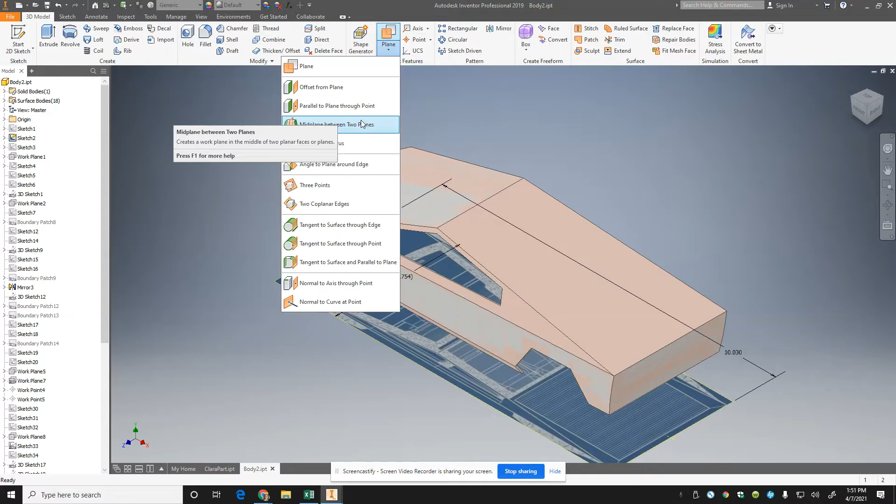First thing I'm going to do is make a work plane parallel to plane through a point. I'm going to make it parallel to the bottom plane.

A lot of you guys made work planes on these surfaces, which is a good idea, but you don't really need to. You make a work plane on the top, and I'm thinking we'll be able to emboss on these surfaces. But now I've got to be able to see through this model, right?

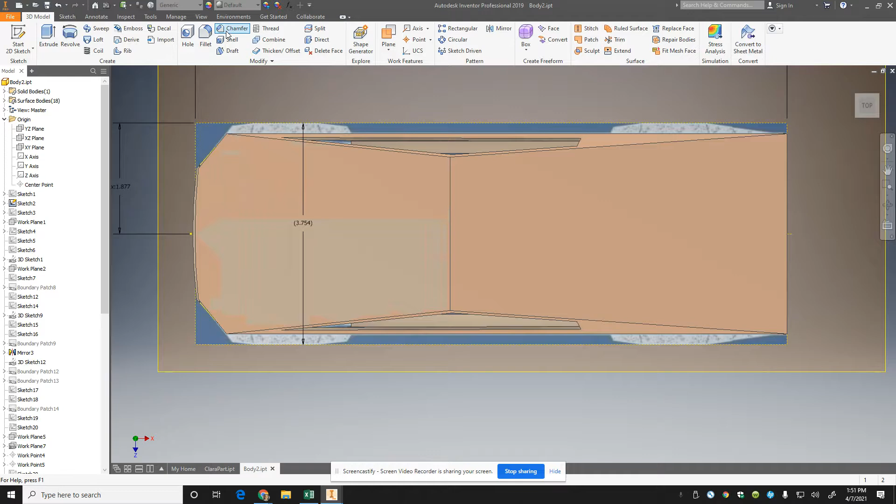So there's a few ways to do that. You can change your visual style to shaded with hidden edges. All right, that didn't really help.

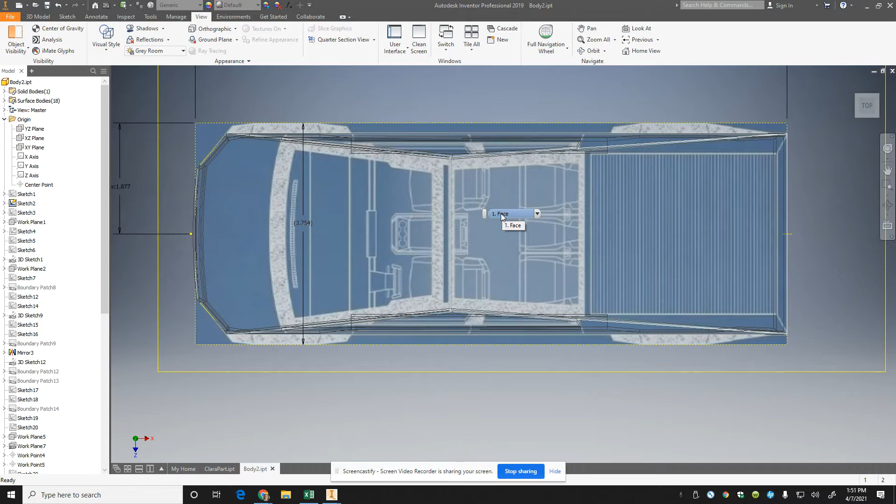I can change it to wireframe, model edges only. What wireframe does is allow you to see through everything. Your model's still there, it's just the outside edges are in wireframe. That's very common, having to change to wireframe mode.

So now what I'm going to do is sketch this. All right, and probably what I'm going to do here is... bless you.

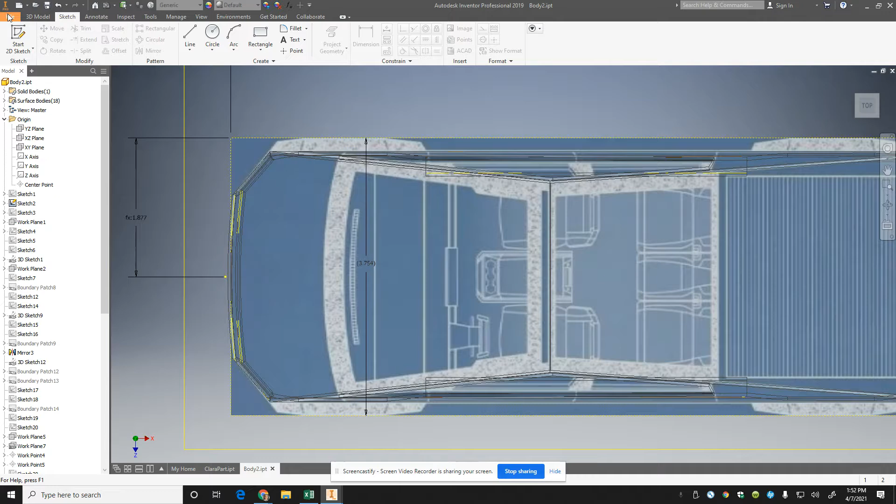Start a sketch on that work plane I just made.

This is probably the center point right there, right? It's probably the center mirror plane. Let me see here. Yeah, that work plane is what we...

All right, so I'm going to make a line down the center. I'm going to do some mirroring here, possibly. I'm going to draw these windows here, but I want them to be symmetric.

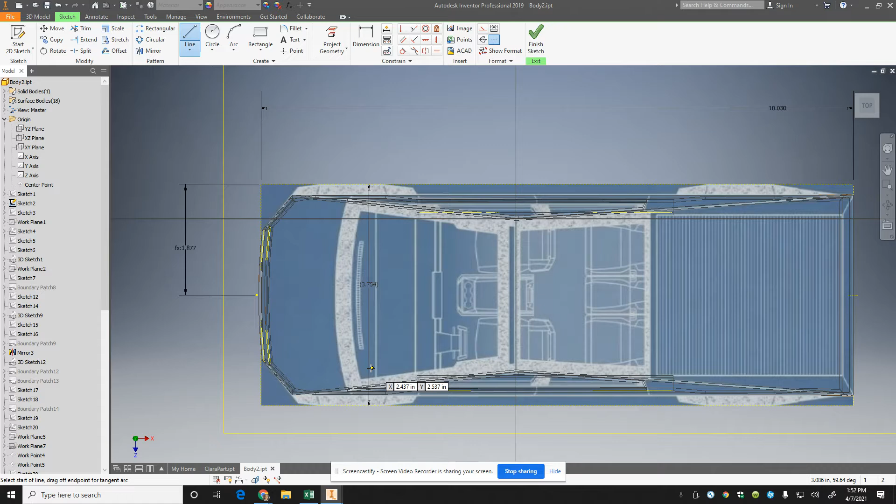So, first thing I'm going to do is draw a construction line right down the middle. All right, I'm going to draw some solid lines.

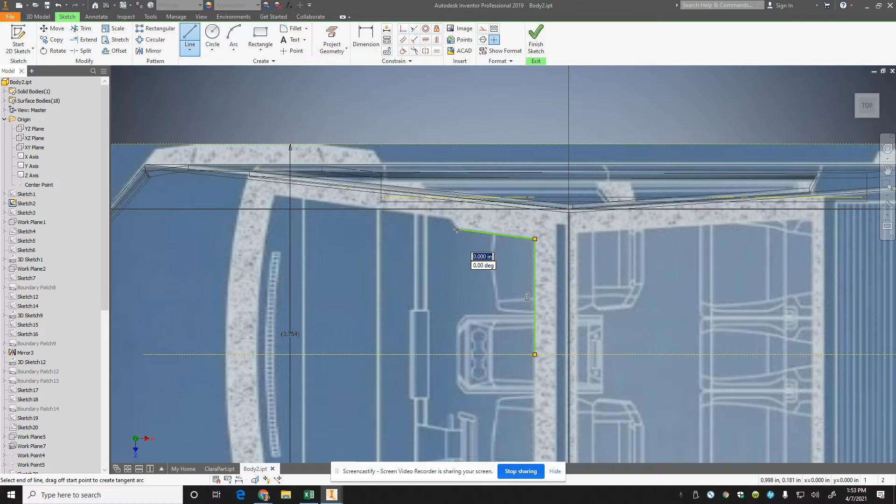Let me zoom in here. Hold down Control so things aren't snapping.

All right, I'm going to mirror that real quick. All right, draw an arc here.

Not bad. Hold down Control so it's not snapping. I guess I'll draw this one back here too.

Again, I want everything symmetric. That's why I'm mirroring.

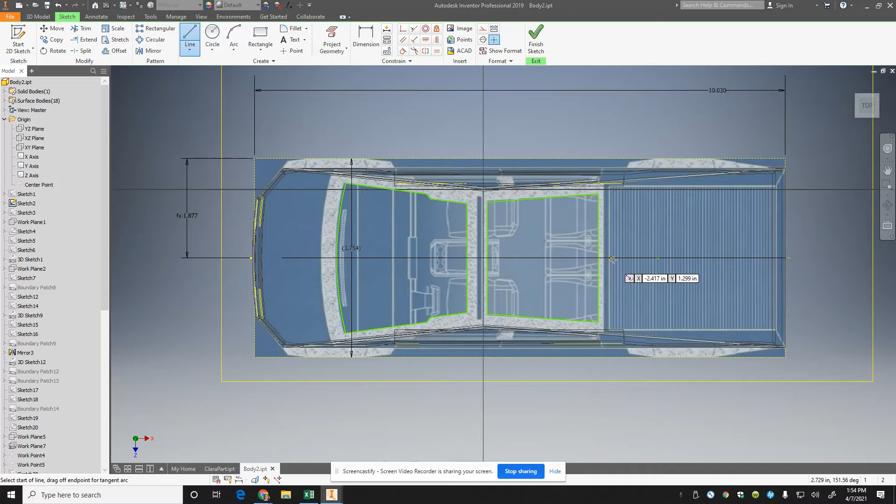All right, and the solar panel on the back here. I don't know how I'm going to do that yet. I might come back to that. I don't even know if I'm going to include that solar panel yet.

All right, so I have this sketch hanging out now. I'm going to go back to my view. Shaded with edges, all right.

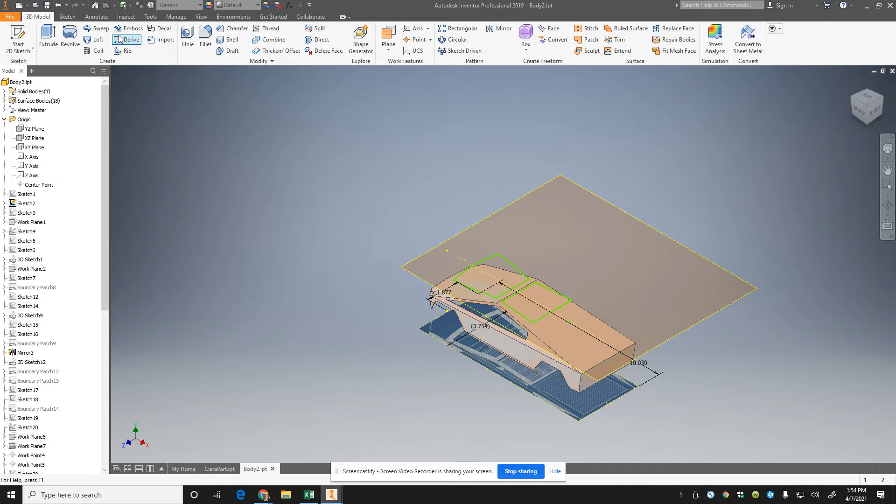I'm going to see if I can emboss this. All right, let's see if it works or if it utterly sputters out and fails.

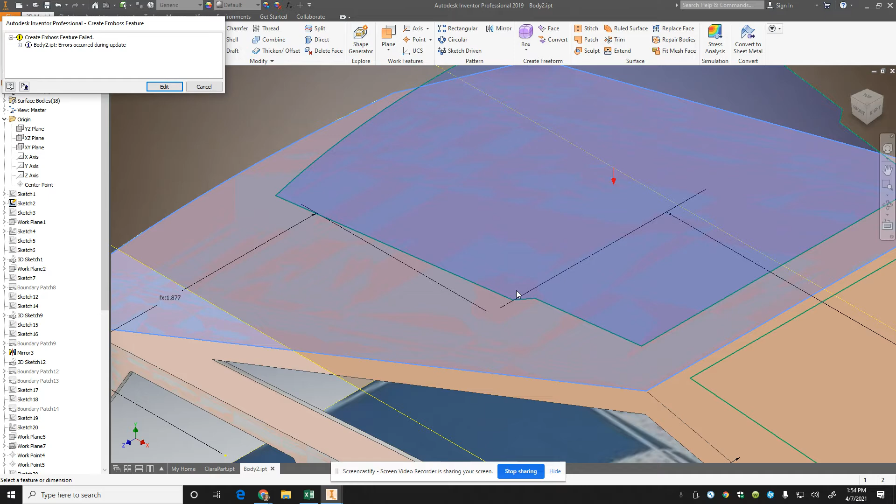Yeah, it probably won't do it to this one. So my embossing of this onto this front windshield didn't work. Why don't you think it worked? Yeah, it's way too irregular. Way too irregular. So I'll have to do like you guys were doing with that work plane.

But I'm thinking in the back, if I try embossing that, I think it'll work. Actually, am I doing that the right way? Let's see. Nope, try that way.

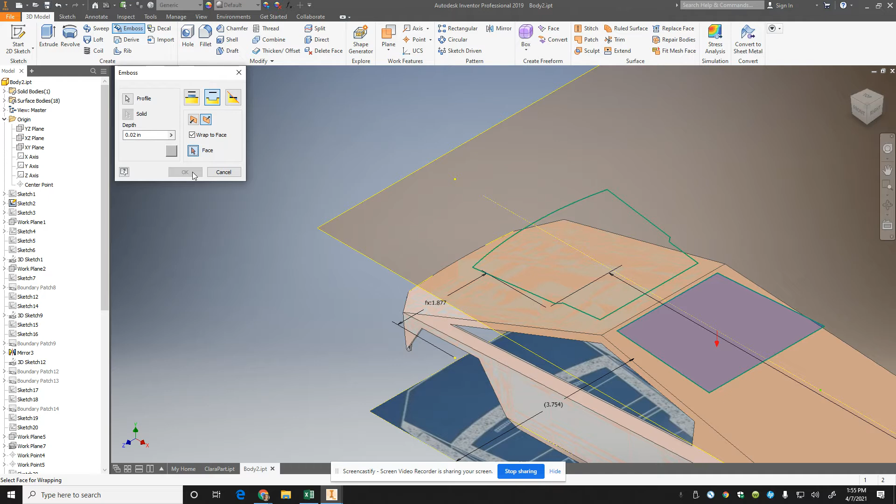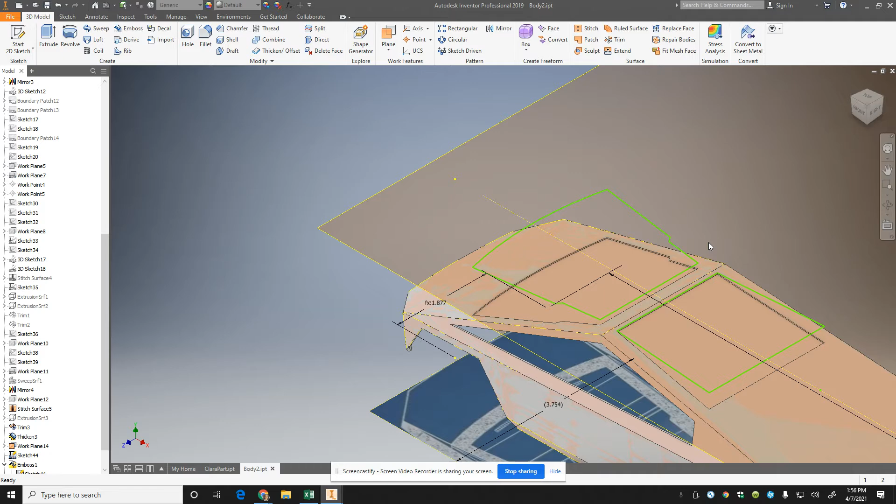Oh, there we go, it worked on the back. Let me make that sketch visible - I had the wrong approach. I shouldn't have tried wrapping the face. Let me try that again. Emboss here, cut... oh, it did work, guys! You just can't click wrap the face. That's a much easier way to do it. You make the work plane above it, draw your sketch through it, and when you emboss it, it just makes it go right down onto it.

So that's kind of cool, I like that. Embossing worked nicely. You guys get what I did there? Just one work plane up top, sketch it, emboss it down. Looks great, I think that's the easiest way. I didn't even have to click wrap the face, I just had to emboss it.

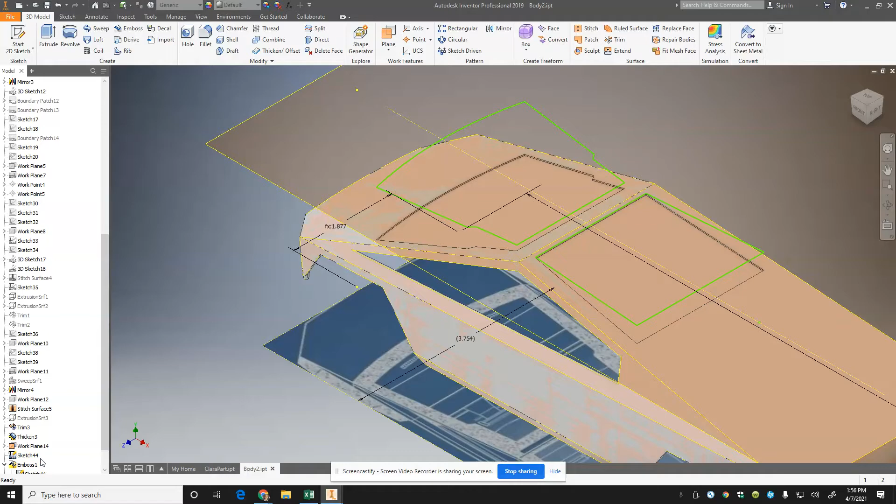Now for the solar panel, let's see if we want to get a little crazy here. Let me go back into this sketch. Let me go view... wireframe. All right, what am I going to do over here? Well, I might do, guys - what I'm thinking for the solar panel is kind of a stylized version of it. Not try to replicate it exactly, but make something that's kind of similar, but it'll actually be visible, just to make it look kind of interesting. I don't know, maybe make some lines. Let's see, let me get my sketch tools.

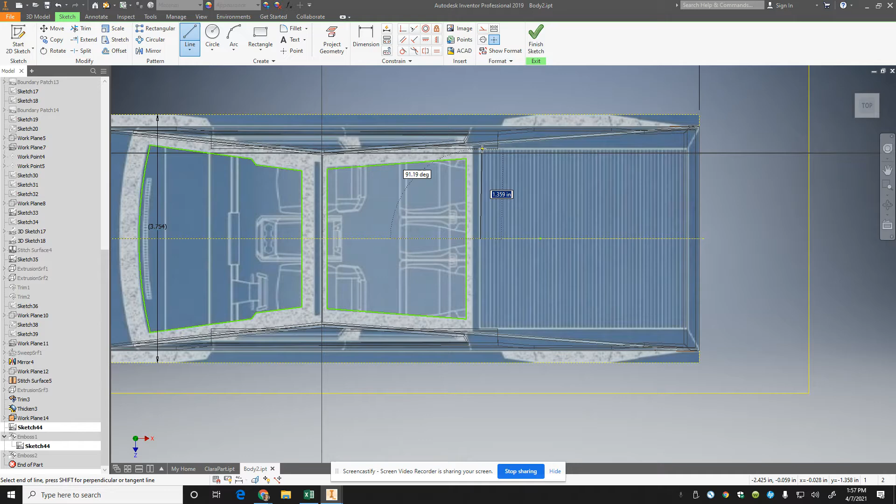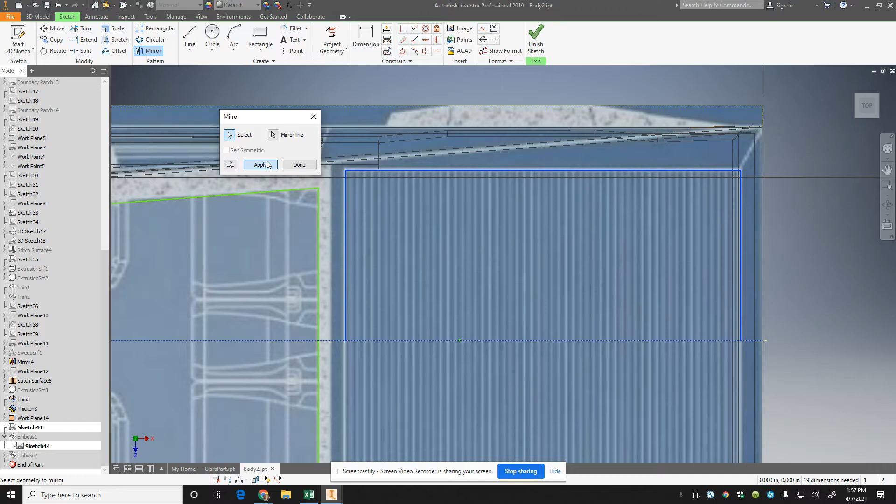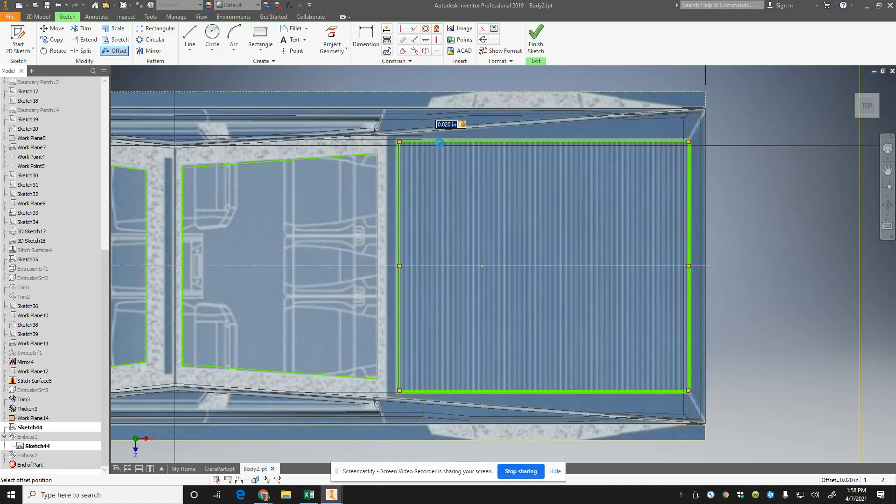All right, I'll mirror that. All right. You know what I'm going to do? Let's see... done. I'm going to offset that. All right.

View. Let me try embossing that. I don't know if .02 will translate to be visible in the 3D print or not. I did it the wrong way. Cut.

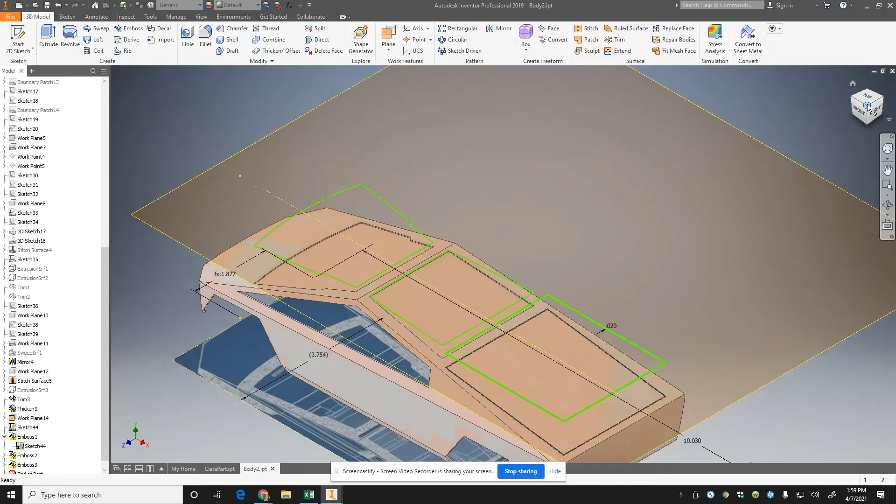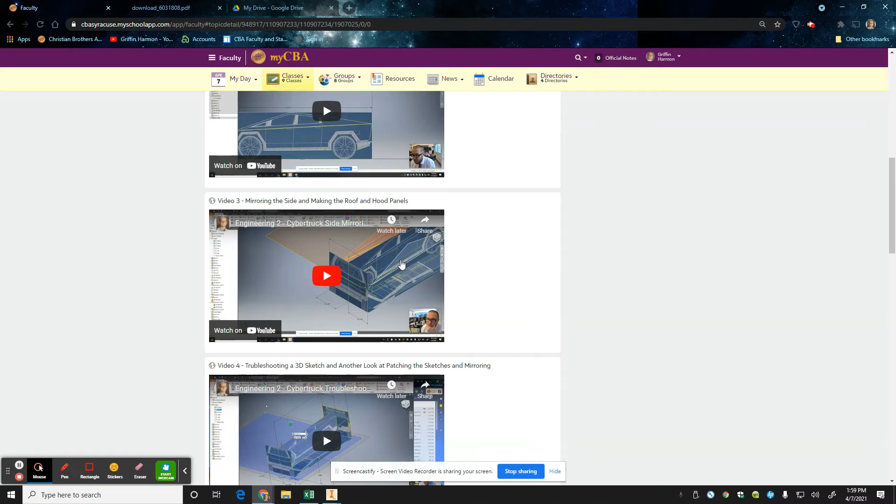Now, does that fall away from the model like that, guys? On the real truck, I don't like the way that looks. Yeah, it does - look at that, it gets farther away from the edge. So the solar panel itself is rectangular, and it gets farther away from the edge. That's interesting. Yeah, look, the solar panel doesn't follow the outer edge - it's rectangular. So it looks kind of weird in the model when you see that rectangle like that.

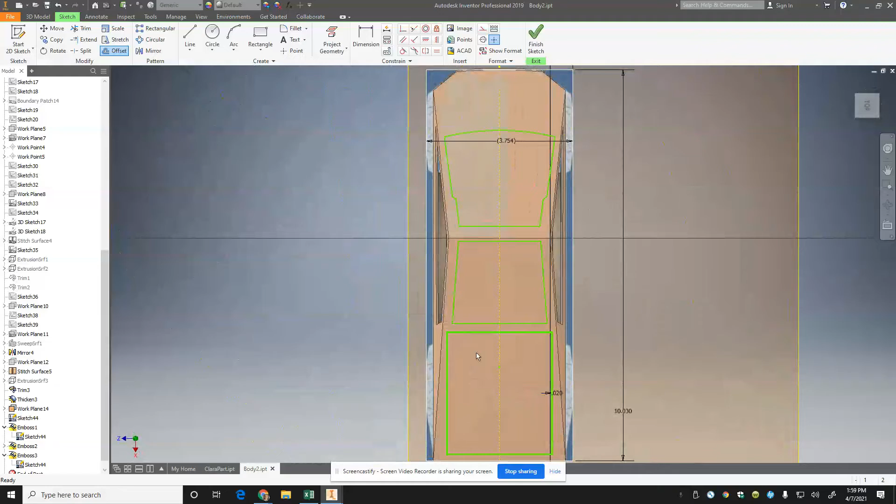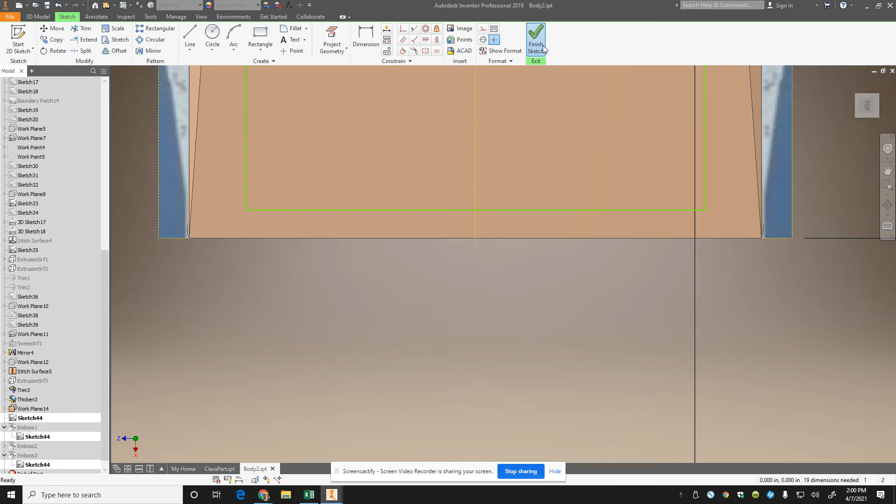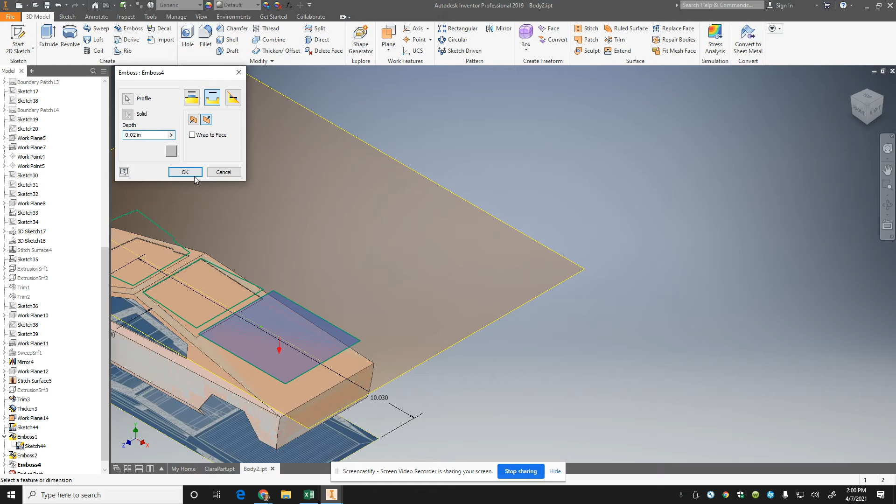Huh, I actually don't like that way, I'm going to change that. Got to delete this emboss. I'm gonna make it the same depth here. That's interesting - now I think what I'm going to do actually...

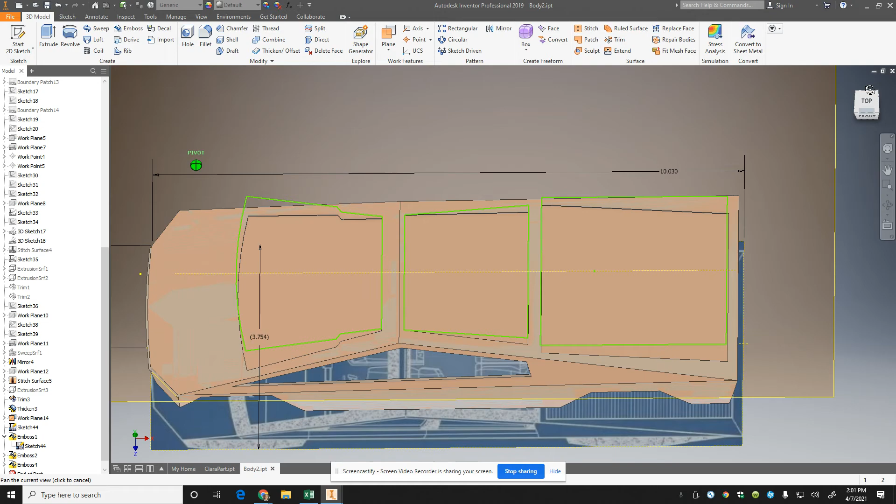I wonder if I kind of want to add a pattern in there.

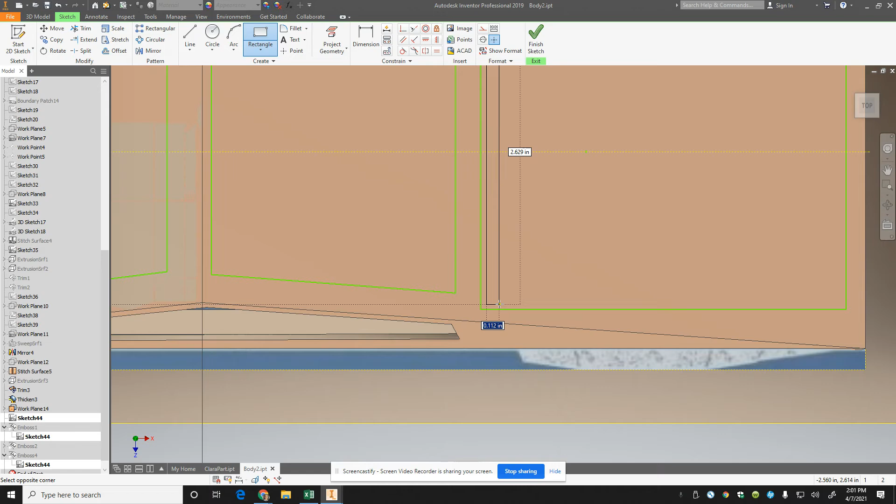All right, hey guys, keep it down, keep it down. I'm just trying to add a little pattern back here for the solar panel.

Let me pattern this. Oops.

Guys, stop talking, I'm trying to add this pattern back here. I'm going to come around and check your progress after this.

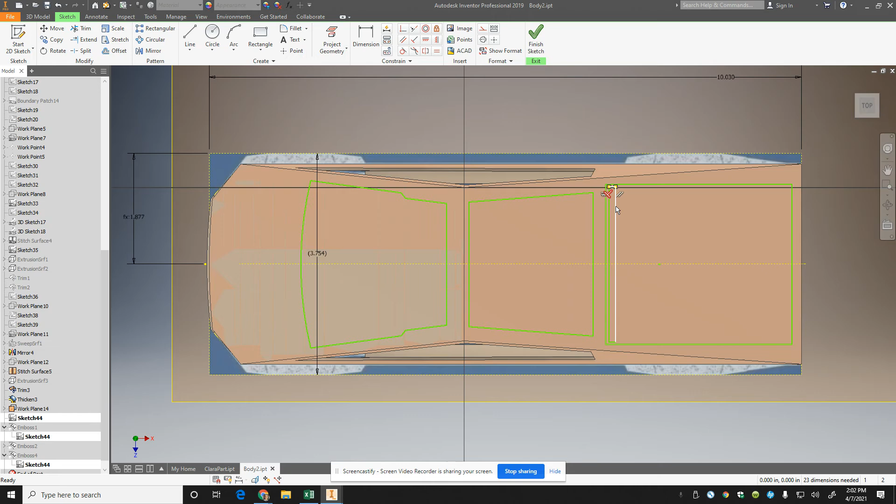All right. So I'm just trying to make a little pattern here, something like that. And I'll just up this spacing until it looks good. Looks good.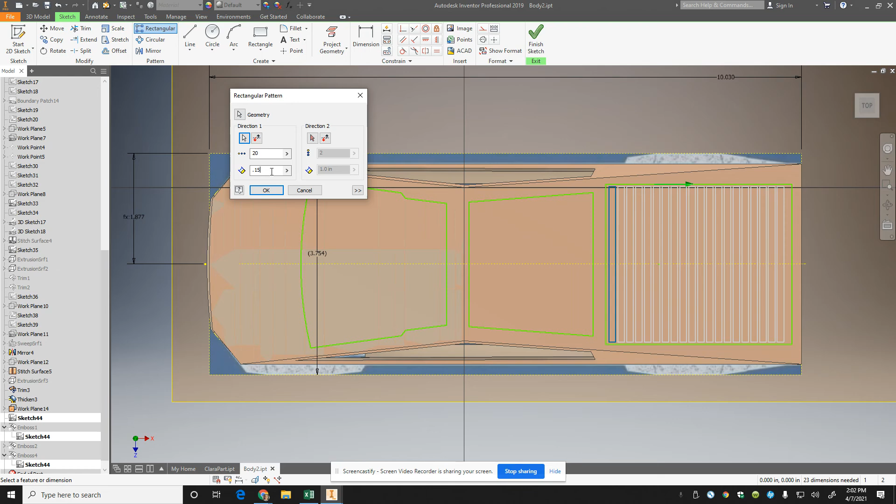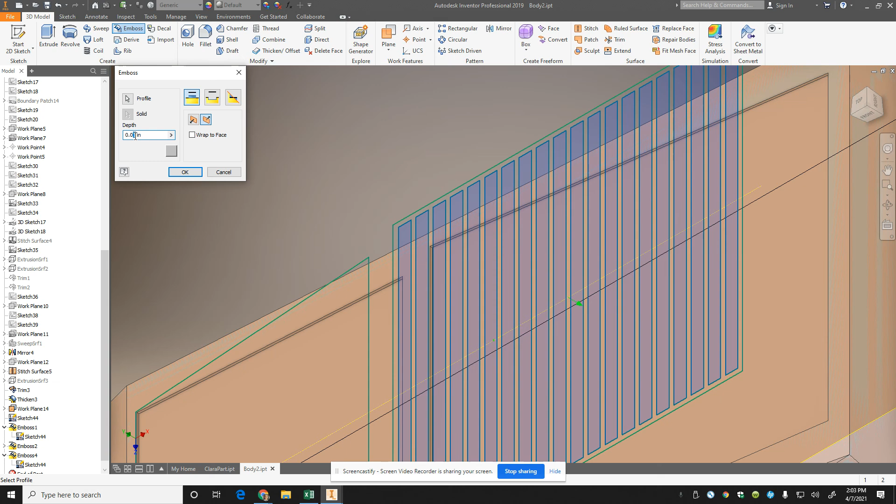All right, now finish sketch. I'm gonna emboss all of those. Gotta be careful clicking here. That's going to be 0.0. I'll try 0.02 and see what that looks like.

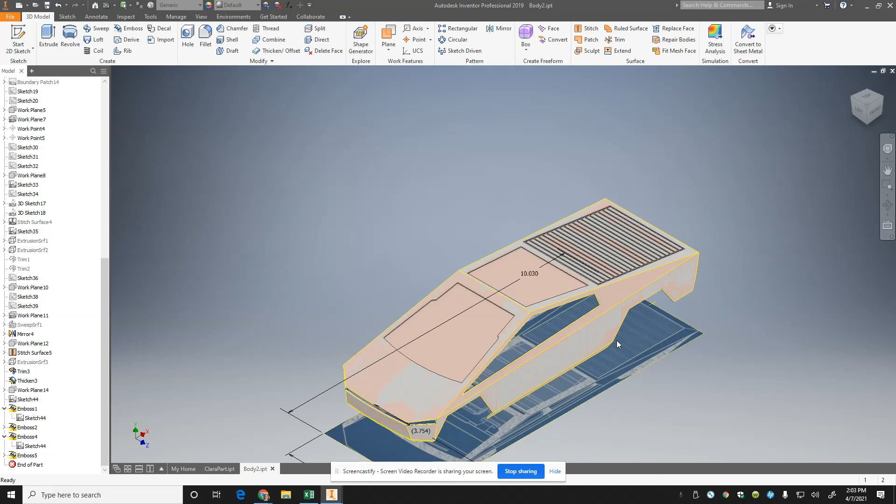All right, that's what I'm going to roll with for the solar panel. So that's how I'm going to go with it, something like that. I know that's not what it really looks like, but it's something stylized to start giving the surface a little more detail, right? So it looks a little more interesting.

Zager, I think, is trying to do something similar with the door panel lines, right? He's trying to emboss - it's just going to be a rectangle. You just draw a rectangle on a work plane on the side. I didn't try embossing it, but it should wrap it right around the whole space. All right, so we're going to start to add some features - got to do something with the window here.